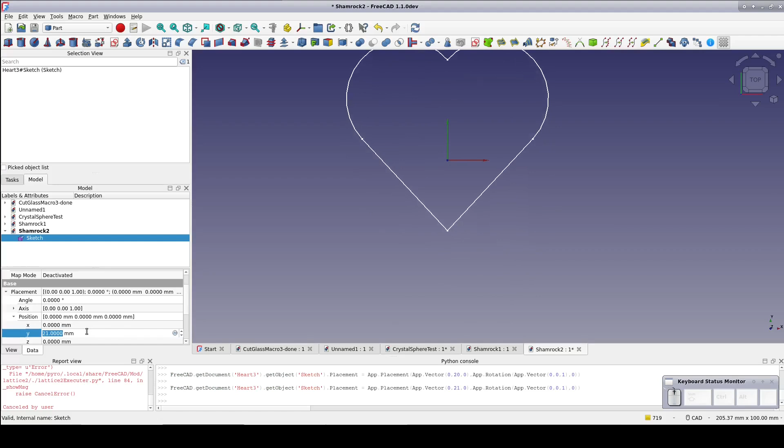Select the sketch and in the data pane, increase the Y position to bring the origin represented by the axis cross very close to but not quite on the tip at the bottom of the heart. We don't want it to actually be at the bottom because some overlap between the polar copies is actually a good thing.

Now extrude the sketch to 10 millimeters. Select the extrude and do a draft polar array. Set the number of copies to 3 and click Reset Point so the rotation will be at the origin rather than whatever random point the mouse pointer brought us to. Hit OK.

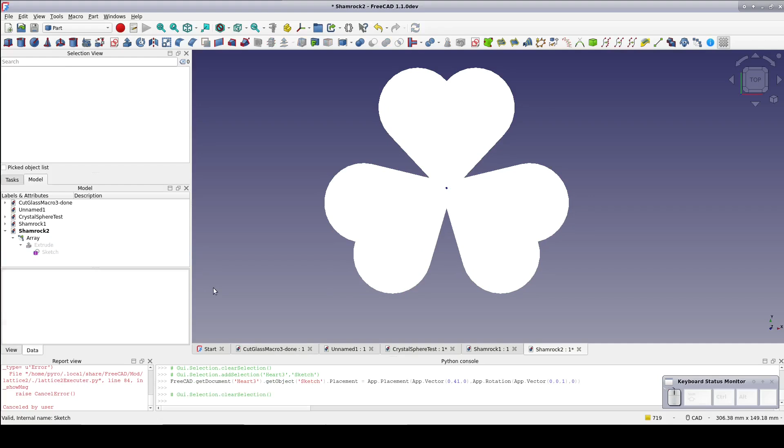That's looking pretty good, but I'd like a little bit more space in the middle. So open up the tree, select the sketch and reduce the Y offset a little bit to make it overlap a little more at the origin. That looks better, 40 millimeters. But it might be nice to do something more interesting than a simple extrude.

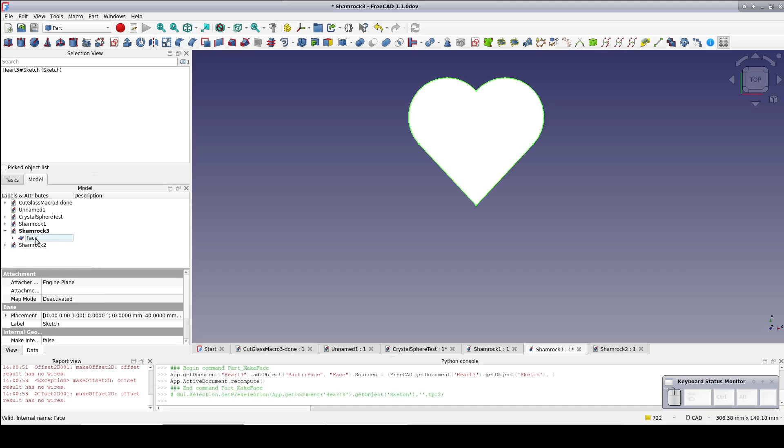Delete the array and the extrude. Select the sketch and click on Make Face from Wires. Select the face and Offset 2D. The offset tool defaults to an offset of 1 millimeter, but in this case we want it to be smaller than the original. So set the offset to -4 millimeters, and OK.

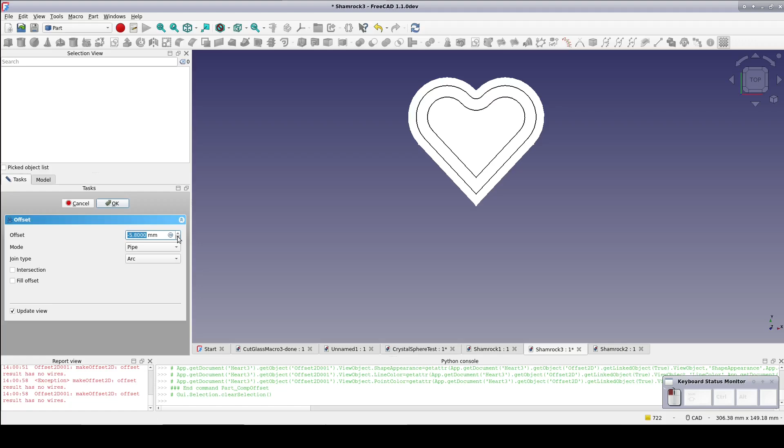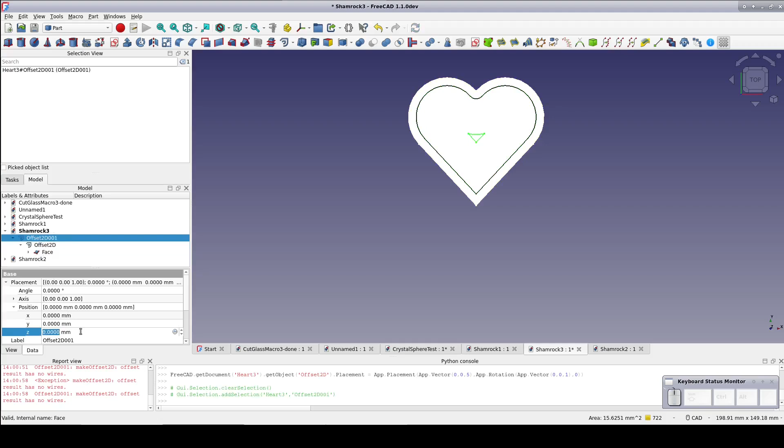Select that offset and make a much smaller offset that almost completely defeatures. I'll just use the scroll wheel. It looks like -18.1 millimeters is about right. Hit OK. Now select the Offset2D and in placement.position set Z to 5 millimeters. For Offset2D001, set placement.position.Z to 10 millimeters.

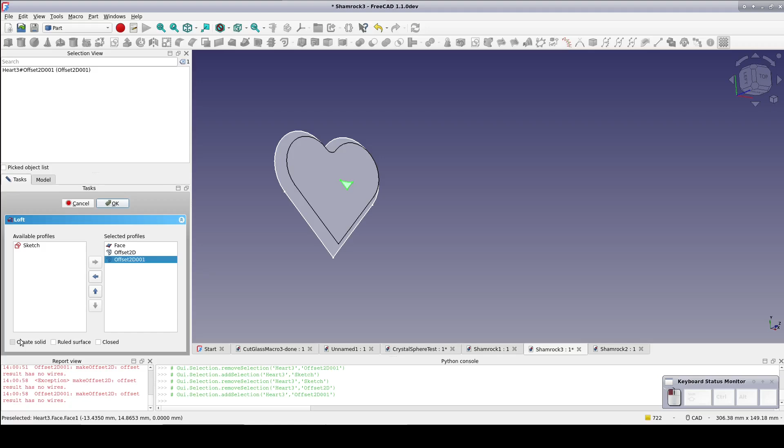Now create a loft. Start with the face, add the Offset2D, and then add Offset2D001. Make a solid and OK. That looks pretty good, but I'd like for it to be a little bit fuller. Open up the loft. Select Offset2D and increase the Z position a little bit. Let's try a little more. Z equals 7 millimeters looks good, so let's keep that.

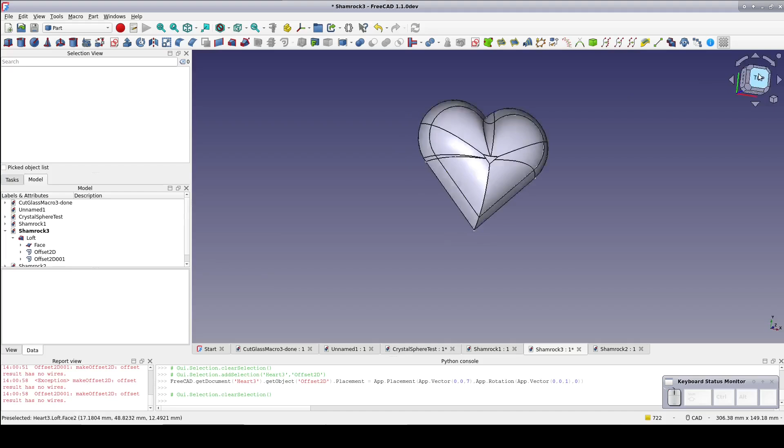Select the loft and the draft polar array. Set the count to 3, reset the center point, and OK. And there we have it.